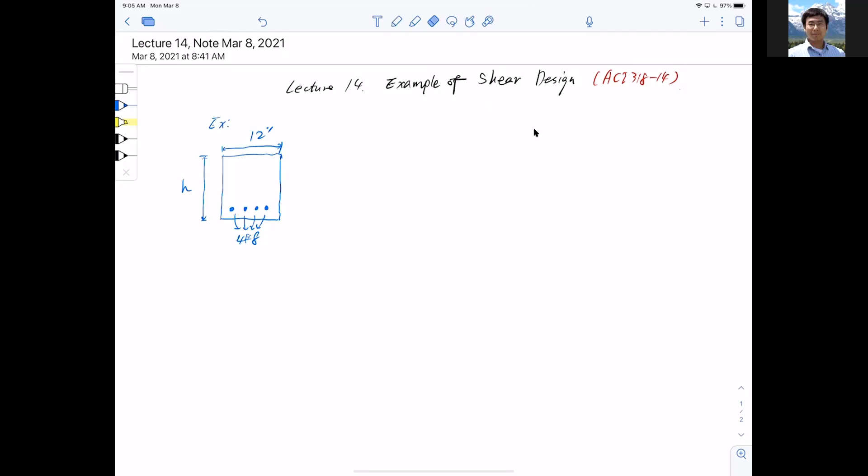Okay, and to make things easier, we also showed you that it has a depth of ds equal to 21.5 inches. So you pretty much can figure that the concrete cover here is about 2.5 inches. Okay. So this is the section, right? And additional information is that if you look at the section,

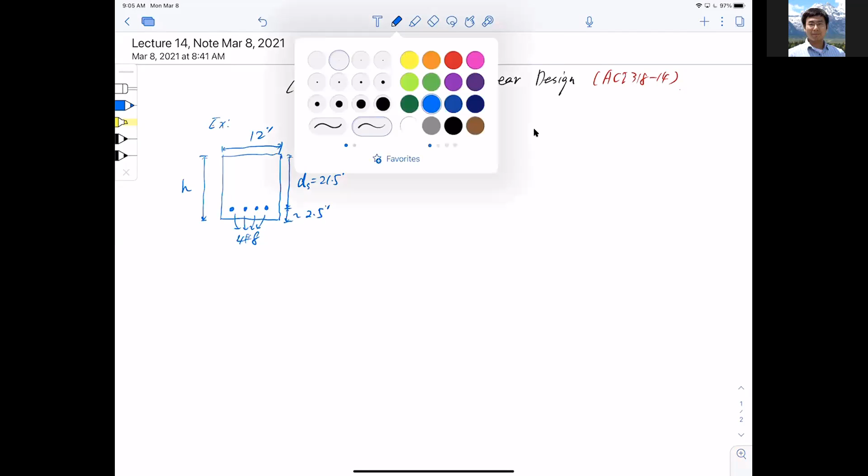we're talking about a simply supported beam for this case, under uniform distributed load. So the critical shear diagram looks like this, a triangle for a simply supported beam, of course. And the section we are looking at right now, say if I call this section AA, is right here. So this is where the section is.

And you notice that the section is not exactly on the support. So where exactly is the section? I just want to see a zoomed-in picture. If I zoom in here, all the details will be exposed. And you will see that it's a support, which is a column. And I have a beam, this is a side view, of course, sticking out like that.

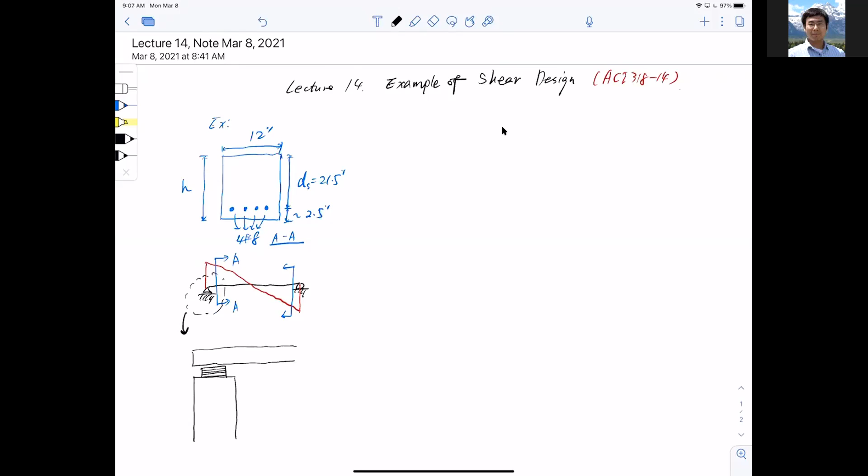And I have a neoprene pad. This neoprene pad is essentially a layer of rubber with thin steel sheets, plies, right? And then the beam is sitting right on top of it. And this is the center line of the column that supports it.

And when we talk about the critical section, sorry, I have more people joining here.

It's not exactly on the support, right? Where exactly is that? It's actually a distance d away from the support. So if I draw my column here and use my red, this is the edge of the support. So it's essentially distance d, and d is the depth. You can say ds as well, ds away, at this section right here. And the diagonal crack looks just like that, 45 degrees.

All right, so this is the section AA we are talking about. And mind you that this is roughly 45 degrees. So if we were to design for shear, we're going to take the shear force right here at section AA as the design shear force. So it's a little bit different, and we will talk about where this typical so-called critical section is right after we finish the example. There's a little bit of detail on the design side of it.

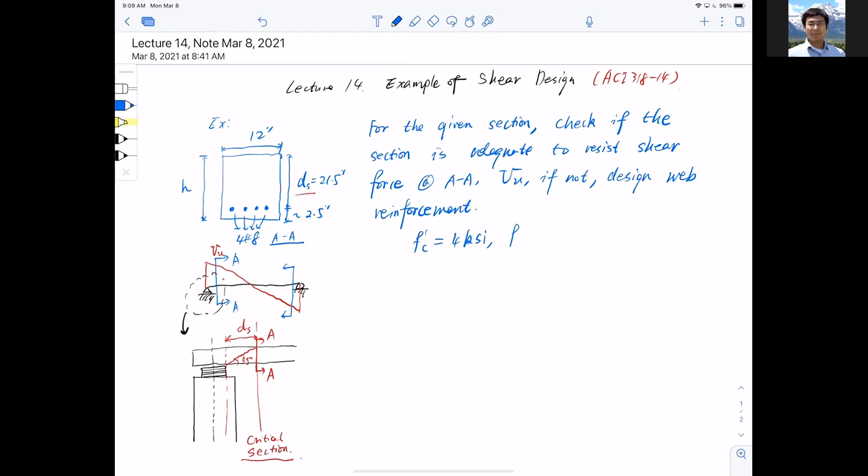Now here are our basic properties: concrete strength 4 ksi, steel strength for the stirrups, fyt, 60 ksi. Whenever you see a t, this is indicating that it is for stirrups. And this is normal weight concrete. Very important, normal weight concrete, meaning lambda equal to 1. And this is a simply supported beam. You probably don't need to know the boundary condition, but that's the condition we have.

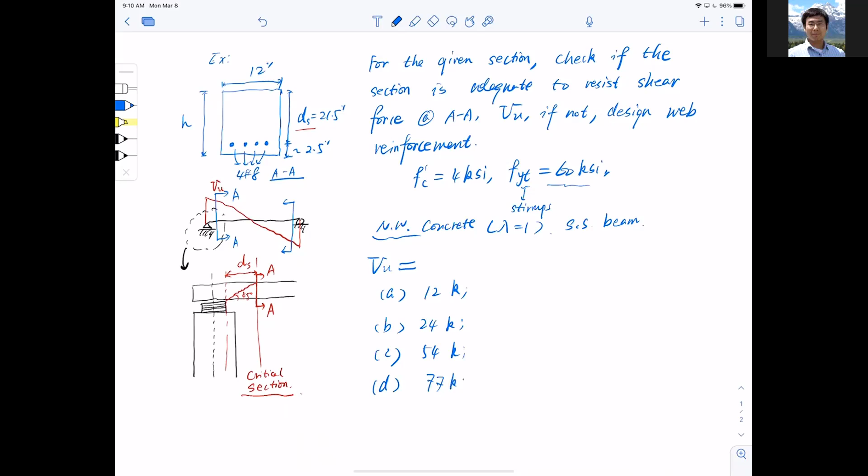So we have a set of shear forces for you to check. Vu can equal A, 12 kips; B, 24 kips; C, 54 kips, just keep increasing; D, 77 kips; and E, 128 kips. Okay, so here's our problem.

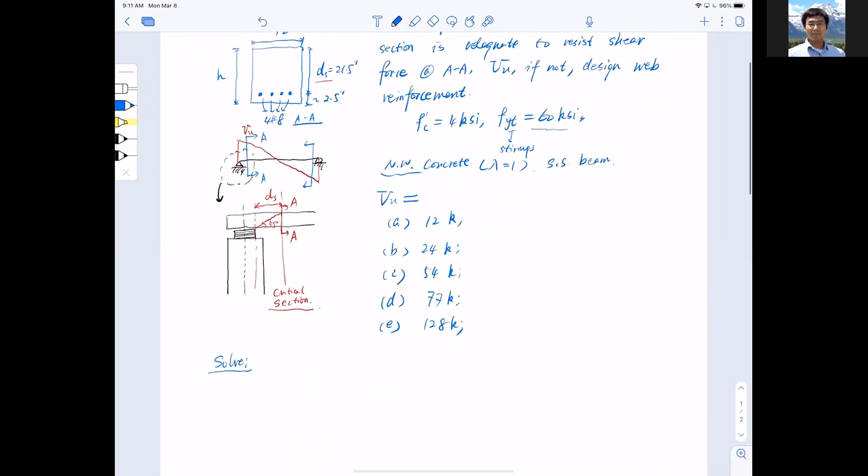To solve this, let's take a look at A first. A, 12 kips. First thing first, I have applied shear of 12 kips. I want to see if my nominal shear resistance is sufficient, so I have to make sure phi Vn is bigger than or equal to Vu, the applied shear. And I know the concrete contribution Vc equals 2 lambda square root of f'c times bw times d.

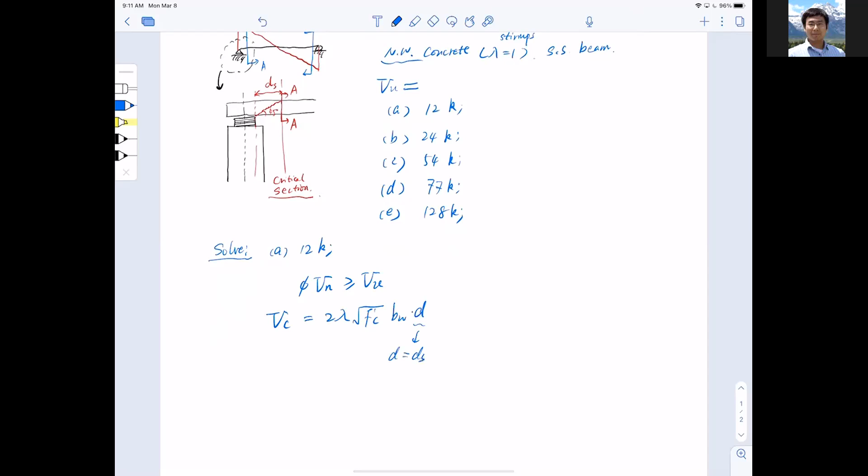Now you notice that whenever I use the shear design equation, I don't differentiate between ds or dt, because d in shear design always equals ds. So that is the contribution from concrete. Let me bring in the numbers: 2 multiplied by lambda equal to 1.0 since it's normal weight concrete, times the square root of 4,000 psi, times 12 inches, which is the width, and 21.5 inches, which is the depth. So that gives me a Vc of 16.3 kips.

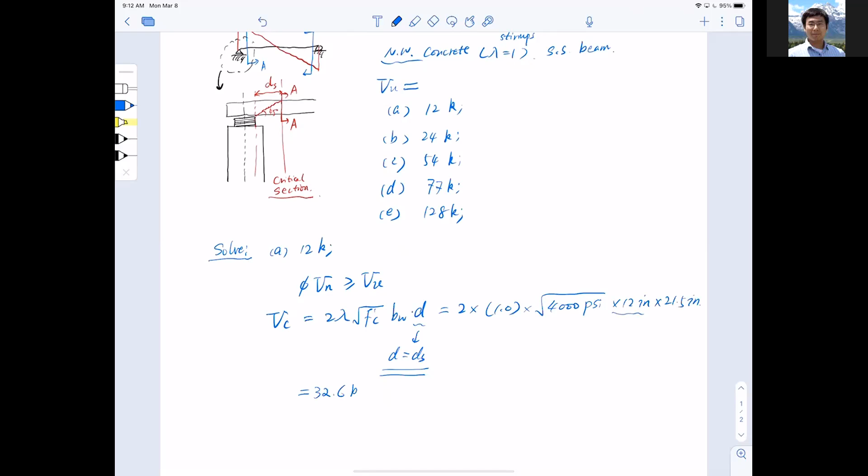And that is how much concrete can contribute to the resistance in shear. Okay, so with that, let me do this. Phi VC equal to 0.75 multiplied by 32.6 kips, and that is 24.5 kips. All right, and this value, you can see that's already larger than the 12 kips applied shear.

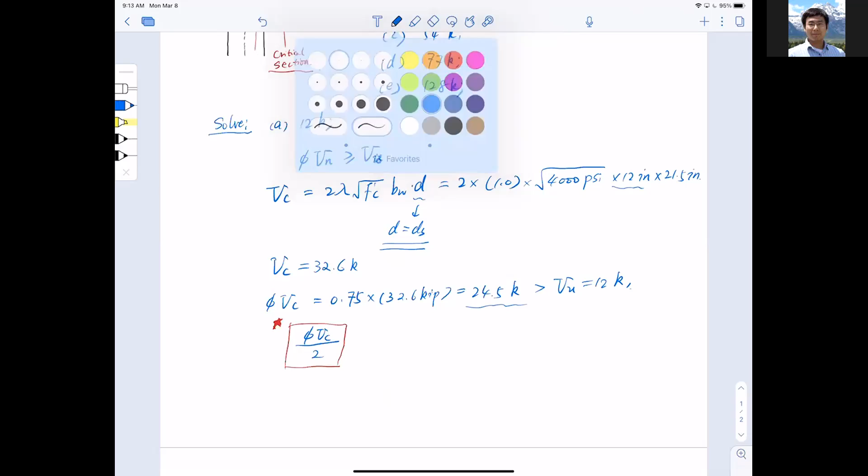Okay, so seems like my section is adequate, but on top of that, I need to double check one thing, and this is from the code. How about half of phi VC? This is important from ACI 318-14. So this turns out equal to 24.5 kips divided by 2, and that gives me 12.25 kips, which is still bigger than the applied shear of 12 kips.

So in this case, ACI says if half of phi VC, that means the factored contribution from the concrete section divided by 2, is larger than VU, meaning you have more than enough resistance from the concrete section already, only minimum web reinforcement is needed. You just need to provide a little bit of reinforcement, and that's fine. So in other words, you just have to provide AV minimum.

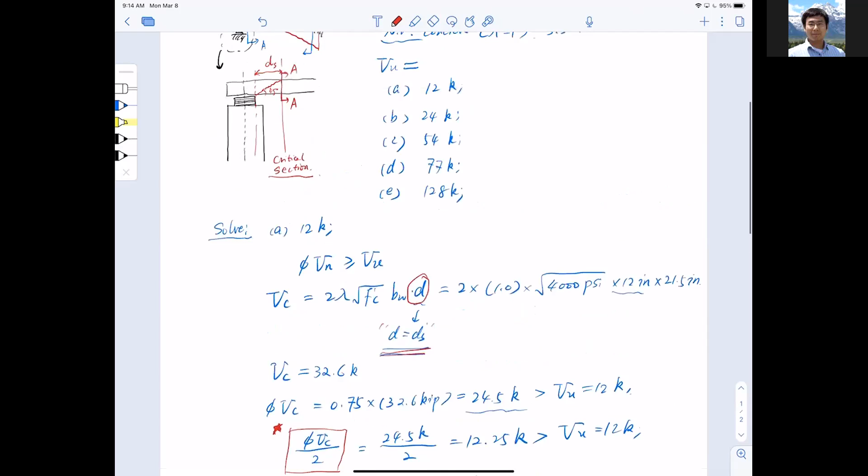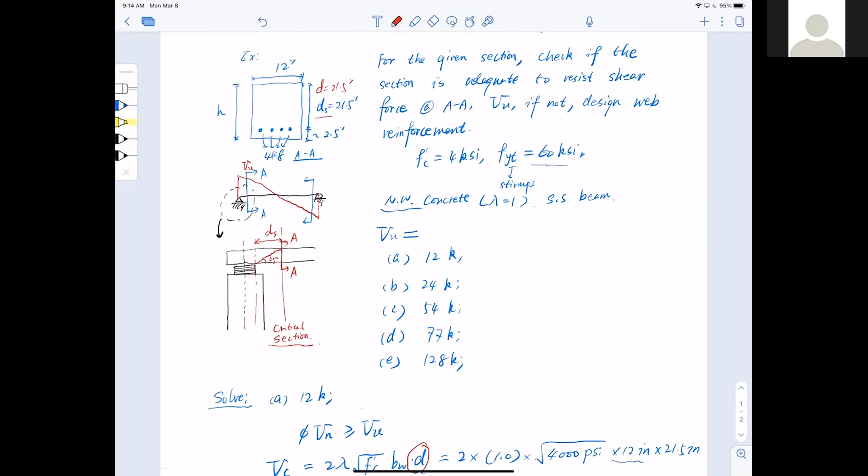Professor, what did you say about D equaling DS? You mean here? Yes. This is just for shear. Whenever you see a D, that is DS. That's just because we're doing shear. Okay, makes sense, thank you. For flexure, you have two Ds, right? You have DS and DT, they're different and they have different purposes. You use DT for finding the strain, finding the phi, and you use DS to find the moment capacity. So slight differentiation.

All right. So this is the requirement. If I satisfy the requirement by only half of the concrete contribution, I just need to provide a minimum reinforcement. That's it, so that's very easy. Now the second part, problem B, I bump up my shear to 24 kips. So naturally you find out that phi VC, calculated here, equals 24.5 kips, and that is slightly bigger than the applied shear, which is 24 kips.

Now for this case, I definitely know that half of phi VC is not greater than VU, so I cannot provide just the minimum reinforcement AV min anymore. But still, this is the concrete contribution and this is the applied shear, meaning I don't need any calculations on the shear reinforcement. Let me put an asterisk here. So no need to compute VS, which is the shear contribution from the web reinforcement. But we still have to use S max instead, the spacing control, to insert a minimum amount of reinforcement. How? I'm going to show you.

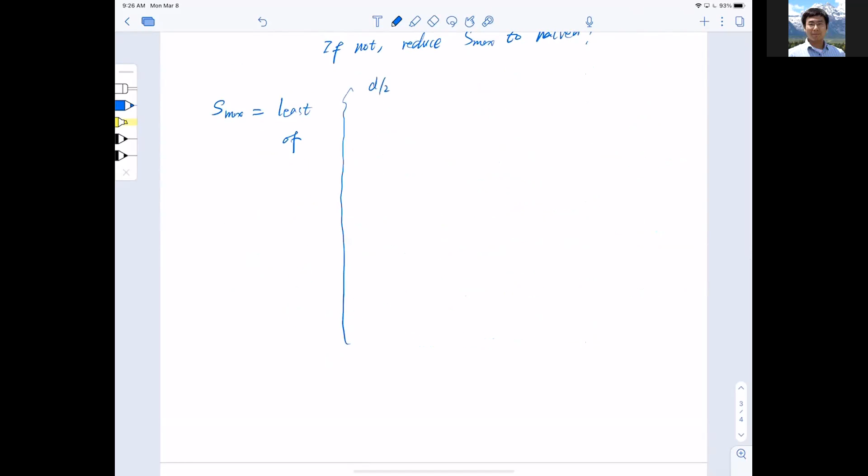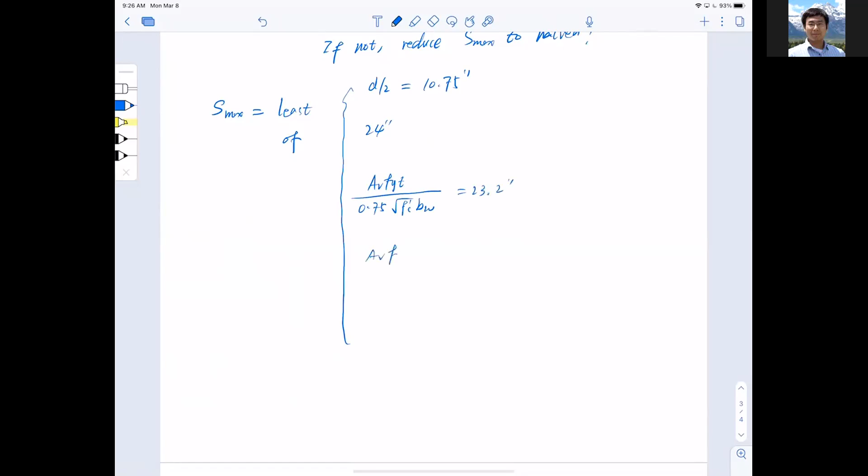So S max would equal the least of, don't forget, the smallest number of the following equations. First, D over 2, which gives me 10.75 inches. Then 24 inches. Then AV FYT divided by 0.75 square root F prime C BW, which is 23.2 inches. And then AV FYT divided by 50 BW, and that is 22 inches.

So what is the calculation process? These 4 are inherited from here. I got these 4 already, so I still use these 4. And I just have to mark here, this is assuming number 3 stirrups. So why recompute? I have done this before, and these are the spacing requirements, so I'm going to keep using them. But on top of these 4, I have to add 1. So what do I need to add?

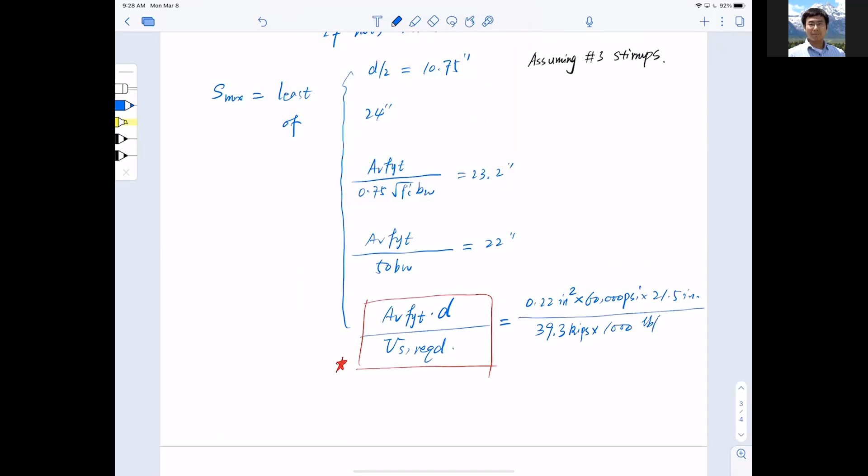This is AV FYT multiplied by depth D, divided by VS required. That is the additional computation. So let's bring the numbers in here. Assuming number 3, 0.22 square inches, FYT 60,000 PSI, D 21.5 inches, divided by VS required equal to 39.3 kips, multiplied by 1,000 pounds per kip. Just convert everything to PSI, pounds, and inches. And now I got this number to be 7.26 inches.

Observing all these 5 numbers, it's not 4 anymore, and this one governs. 7.26 governs. So what does it mean? It means that the spacing provided has to be smaller than S max, which equals 7.26 inches. For safety, I want to use denser stirrups, smaller spacing. So I'm going to use number 3 stirrups at a spacing of 6 inches. That satisfies the requirement.

Professor? Yep. How do we know when we have to do the additional check there? So the additional calculation actually comes from here. When I know that my concrete section is no longer sufficient, I immediately know that I need to compute VS required. Like I said, in cases A and B where concrete is sufficient, I don't have to compute the web reinforcement. And when I see this is not zero or negative, it means I need shear reinforcement.

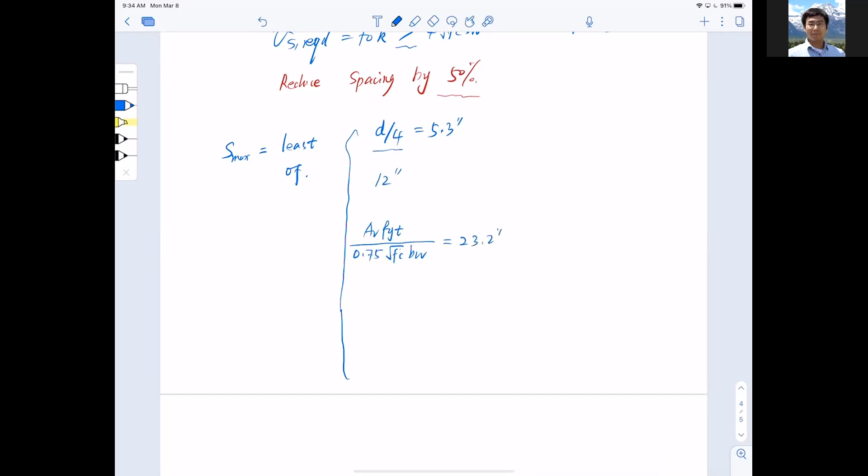So S max should equal the least of. All right, so I know it's going to be 50% off. So D instead of divided by 2 is now divided by 4. So that is 5.3 inches. Next one, it was 24 inch and now divided by 2, which is 12 inch. Okay, and now AV FYT divided by 0.75 square root f prime c and BW, and this value stays, which is 23.2 inch we calculated before, and then AV FYT divided by 50 BW, and that equal to 22 inch also stays.

And the last one is the computed one. Don't forget AV FYT multiplied by D divided by VS required. Okay, and that is crucial. So this brings the number in: 0.22 inch squared multiplied by 60,000 psi and multiplied by 21.5 inch and divided by required shear, which is 70,000 pounds, 70 kips. And I got this number to be 4.1 inch. And this is actually the smallest. So this number governs the spacing.

Okay, now to ensure I have enough stirrups, I'm gonna use number 3 stirrups. And don't forget, this is all under the assumption of number 3 stirrups. You say, Bob, do I have to use number 3? No. If you want to use number 4, the only thing that changes is the cross-section area of the reinforcement AV here. So if anything changes, that is the only thing that needs to be changed.

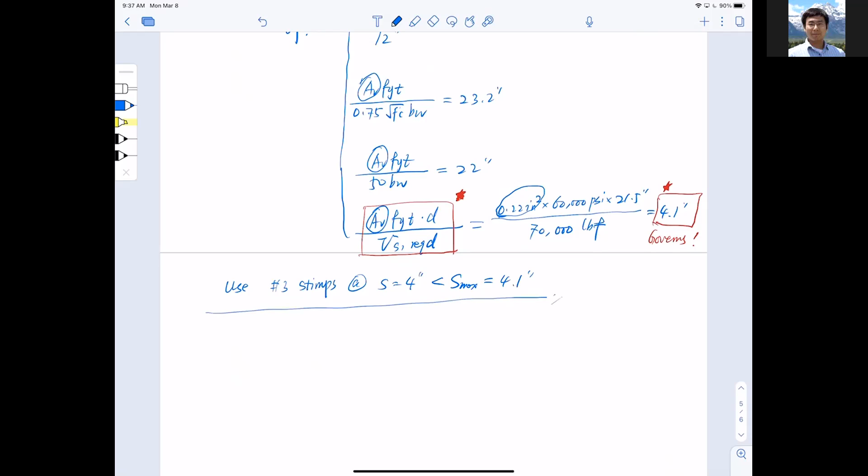But anyway, I'm going to use number 3 stirrups at S equal to 4 inches. And mind you, that is smaller than the maximum spacing governing value, which is 4.1 inch. So I'm okay. All right, so that is how we're going to handle half the spacing requirement. Okay, but the game is not over yet.

I'm going to push my shear up to the limit. VU, let's make it even more, 128 kips. Substantial, right? This is too much. I know this is bigger than VC, so web reinforcement is definitely needed. And I just need to compute VS required: VU divided by phi minus VC, so 128 kips divided by 0.75 minus VC, which is 32.6 kips. So I got this number to be 138 kips.

Needless to say, this is very big. But I'm gonna go ahead and do the 2 checks. I still need to check. And I have a prediction that I will fail my section size check first. VS required is 138 kips, and this is indeed greater than 8 times square root f prime c BWD, previously calculated to be 130.6 kips. That means I rely too much on the reinforcement. So in this case, no good. I need to increase the section size.

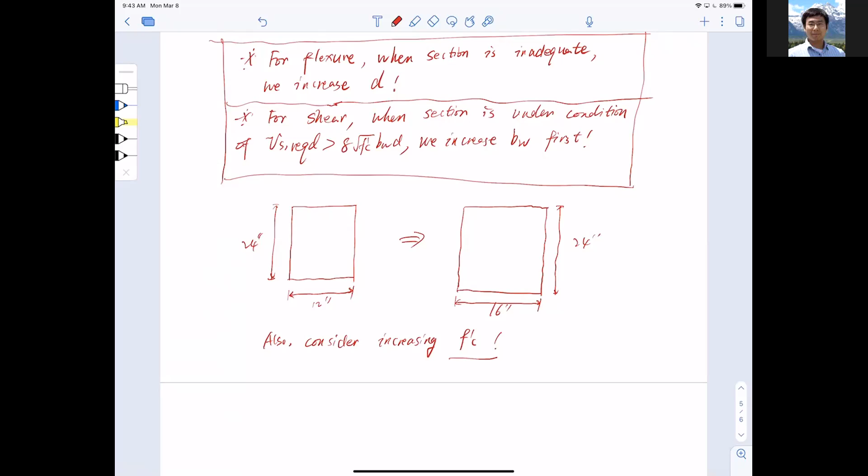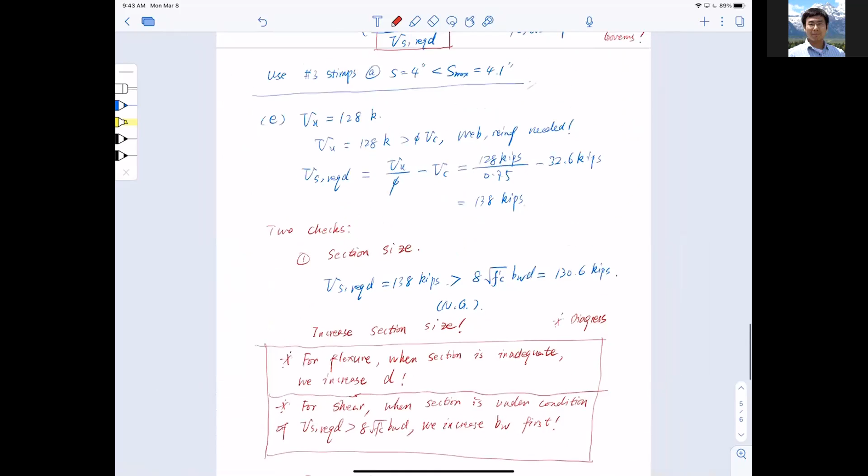But normally in our practice, at this point, we're just going to increase the section and go back to the drawing board to look at A, B, C, D, E, these 5 approaches, and see which one applies under the increased section. So this one is over for E. We'll stop at E. And in the exam, we will most likely not have E, but A, B, C, D.

So I'm going to pause for a second. Any questions on this, folks? Anything, guys? Anything? All right. So I hope this is clear, and this is very, very important. Design for shear.

I have a few minutes, so let me just start a little bit on the critical section. Now I want to open up a small side topic, which is actually important, which is the critical section for shear design.

Now, this is a long example. You might need to read it several times to digest, which is understandable, and ask me questions whenever you have them. But I just want to go back to see these small details here. I drew you the section, the shear diagram, and labeled where exactly the critical section is, which is a distance d away from the edge of the support.

You may have a question: Bob, every time we see a support, we pick this critical section to find the shear force, but you see the maximum shear force is actually here, right? It's at the end. It's not exactly at the critical section. So why do you do that?

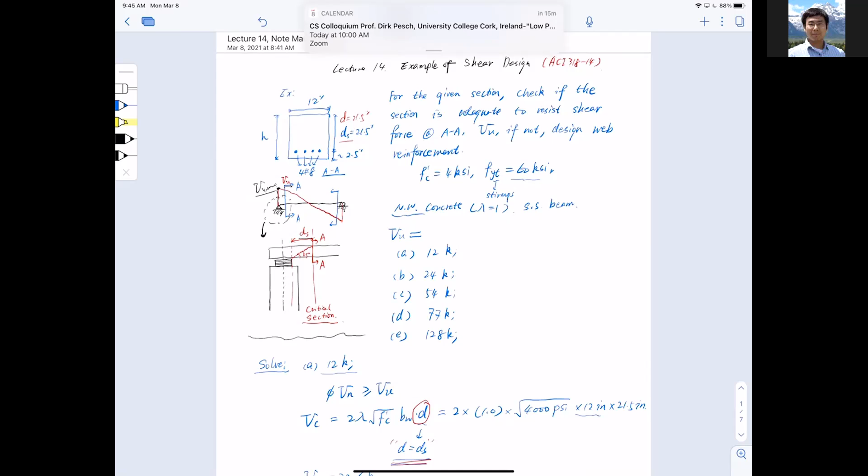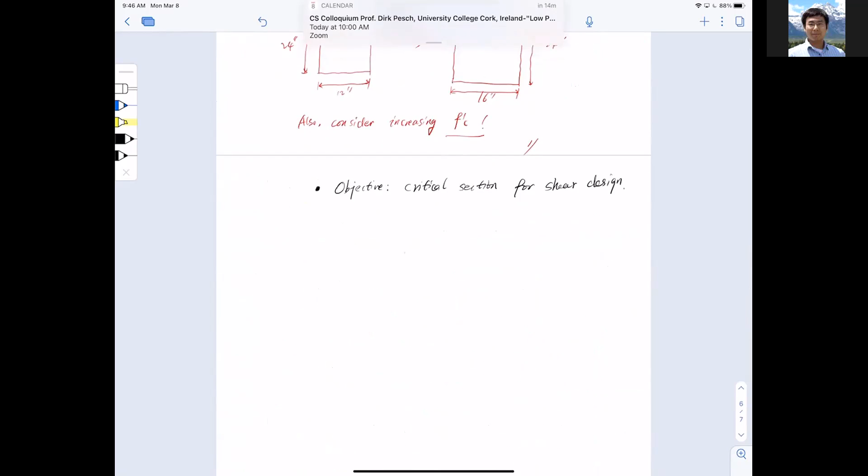Then this begs the question, right? What are these critical sections? How do we define them, and how do we label them in the real structure? So this is what this objective is going to talk about. Okay, so first of all, let's show, sorry about that, let me just change it. So, list of critical sections in the code.

Okay, and this is in ACI 4.4.3.2. And this is the same for 318-14 and 318-19. This hasn't changed. This is very important. If you cannot find it, let me know. If I mislabel it, let me know. But this will be in exam number 2 for sure.

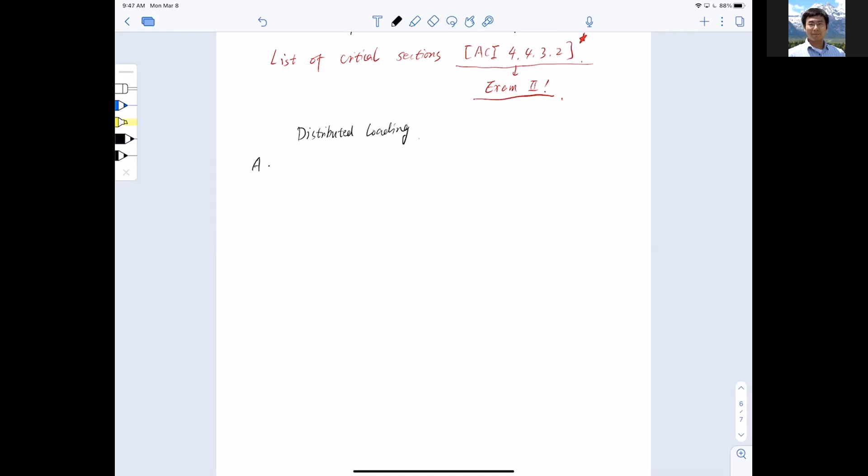All right. So what does it list? Let me draw it up. So in case A, and don't forget, this is under distributed loading. Just put it right in front. So in case A, I have a very typical simply supported condition. SS, simply supported. Make sure you know that. For the simply supported case, let me draw it. I have a side view of a beam resting on the column.

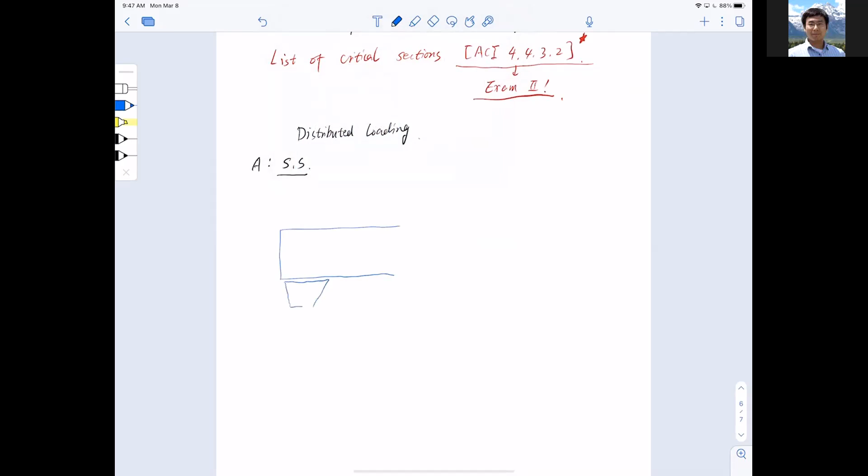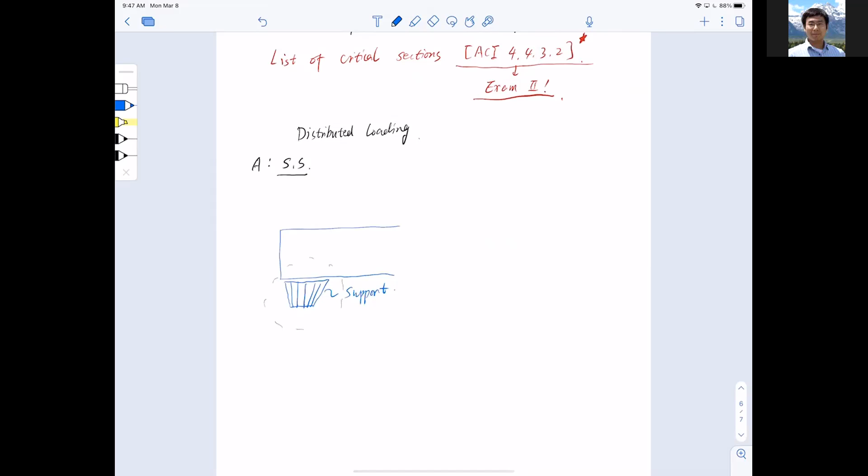Let's just assume it's a steel beam and I have a rib support. I want to draw it as clear as possible. And this usually is a rocker, so it will create a simply supported case. If I draw it more clearly, this is more like a hinged steel plate, pinned somewhere, and this is on the base. So it is free to rotate, to simulate the simply supported case.

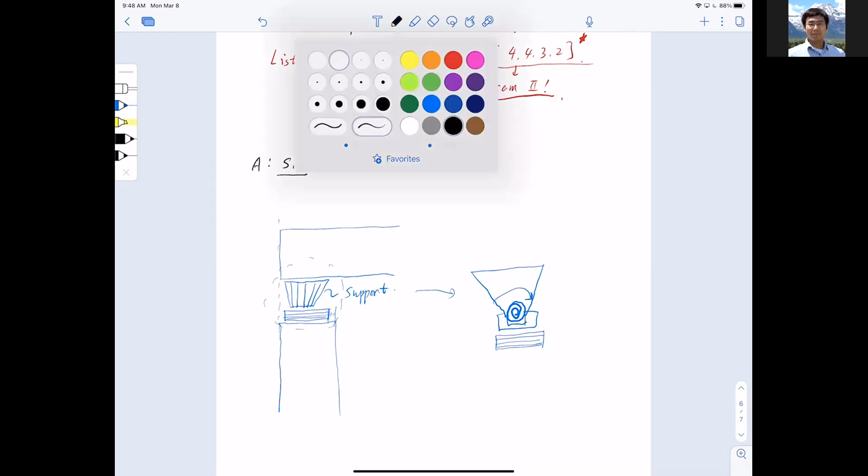Anyway, at the bottom here will be the junction where the rocker is sitting on the neoprene pads, which are a little bit wider than the rocker. And after that, you see the column underneath it. Usually it's flush to leave space for the adjacent span. And the column here is way wider than the neoprene pads. Now assume this is distributed load, sitting on top of the beam, just like so.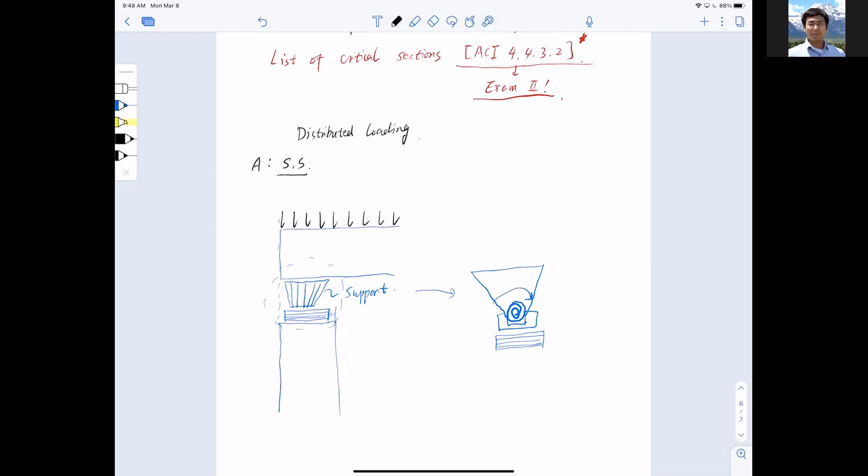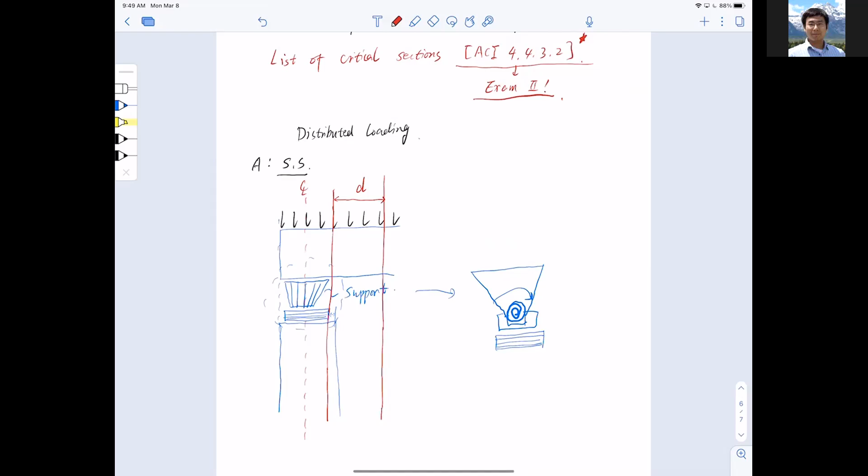All right. So I'm going to decide where I'm going to pick the critical section. Red line, this is the center line of the support. And this is the edge of the support. You see that I'm putting it right on the edge of the neoprene pad. This is the edge, and that is the starting line. You go horizontally a distance of d away from it, and that, ladies and gentlemen, is my critical section.

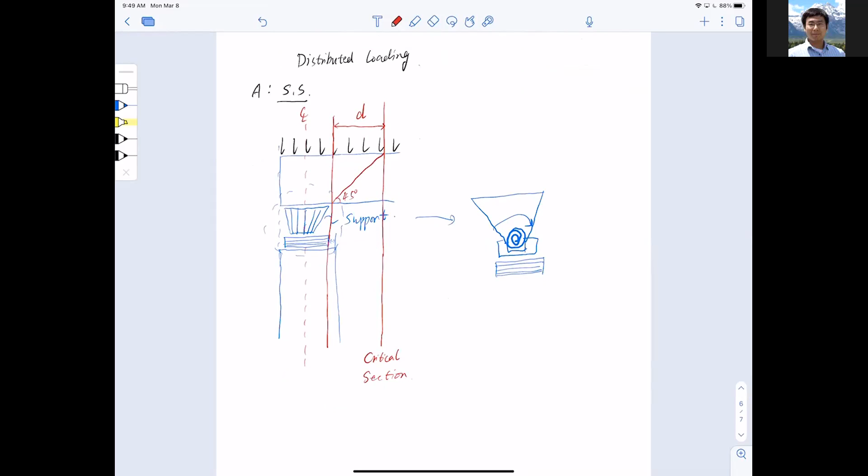And why is that? Because, and you need to draw this in your exam as well, I will have a diagonal crack at 45 degrees, like that. So correspondingly in the shear diagram, remember? This will be the rocker. Maximum shear should be here, V max, Vu max actually. And then if I do a drawing.

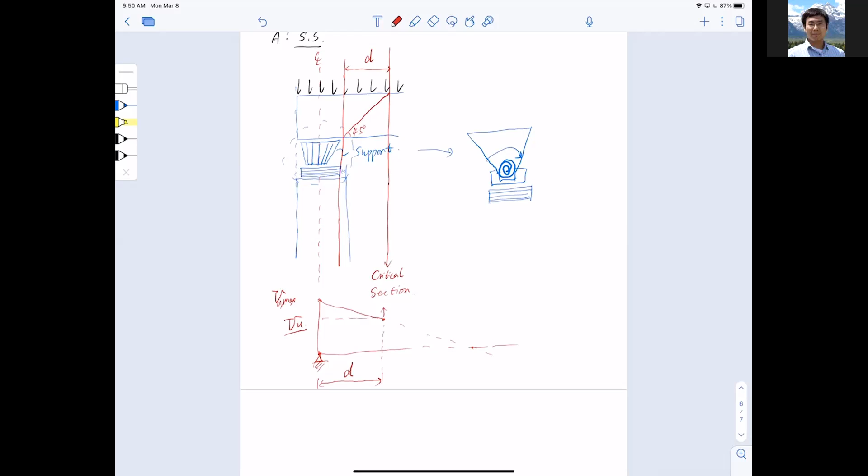Oops, this is not realistic. So I do a drawing, and it cuts right here. Of course, extended somewhere, it should be crossing zero, but that's fine. And the distance right here is d. And this value here, folks, is the Vu for design. So that is very important. You need to know where that location is when we design.

Okay. I'm just going to stop here. This is only one part of the list. I'll finish the list next lecture on Wednesday. But with the example, you're ready to do homework. The last problem of the homework I might have to explain on Wednesday, but we're in good shape roughly.